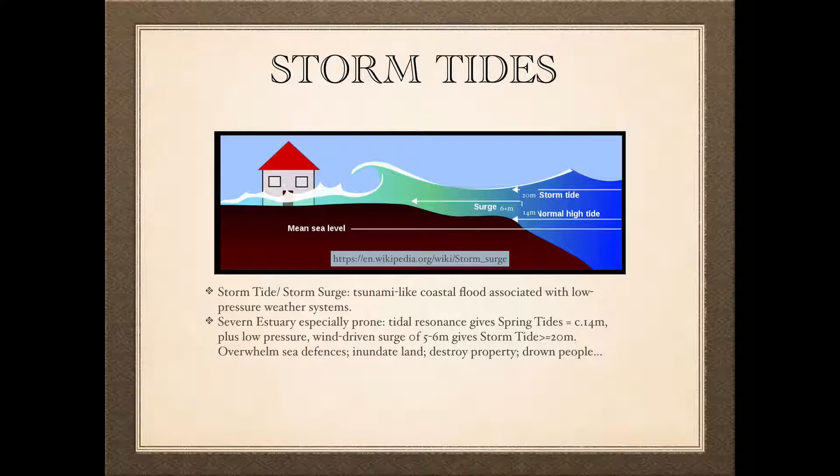Tidal resonance gives spring tides of about 14 metres range. If you add to that a low-pressure wind-driven surge of perhaps 5 or 6 metres, that would give you a storm tide of more than 20 metres. This would overwhelm sea defences, inundate the land, destroy property and drown people.

On top of that, we have to cater for the effects of global warming. Rising sea levels, increasingly severe storms and deeper depressions could lead to future storm tides of 25, 35 metres, more, who knows. However, it's not of immediate concern since it's a rare coincidence.

That rare coincidence means you would have to have a high spring tide plus a deep depression over the Bristol Channel raising a dome of water, plus storm-force winds up the Bristol Channel, creating what some people might call the perfect storm.

Then there's tidal resonance. The incident wave, caused by the moon's rotation around the Earth, is reinforced by reflections between the coast and the continental shelf edge, giving a much higher tidal range at the coast than at the centre of the ocean. The effect is most striking when the continental shelf is about a quarter of a wavelength wide.

The Bristol Channel has the second, some would say the third, highest tidal range in the world. And with the Severn Estuary funnel, it forms this 14-metre tidal range, which is unique.

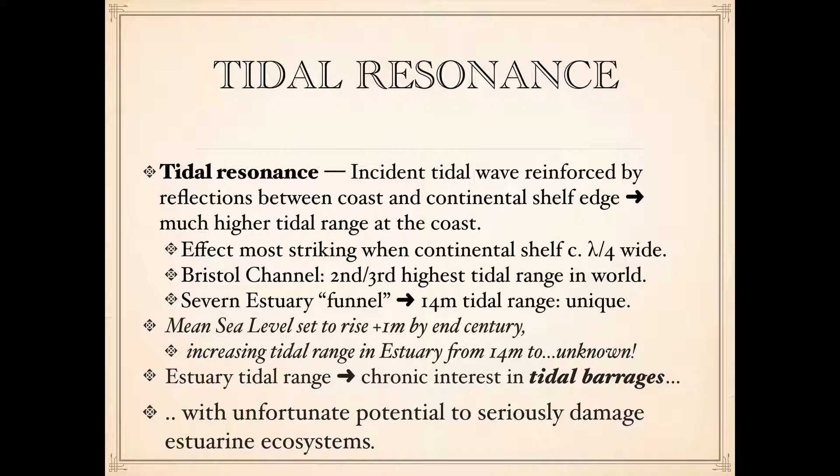The mean sea level is set to rise by more than a metre by the end of the century, increasing the tidal range in the estuary from 14 metres to who knows. The estuary tidal range has been of chronic interest to those with a view to creating tidal barrages, and tidal barrages have an unfortunate potential to seriously damage estuarine ecosystems.

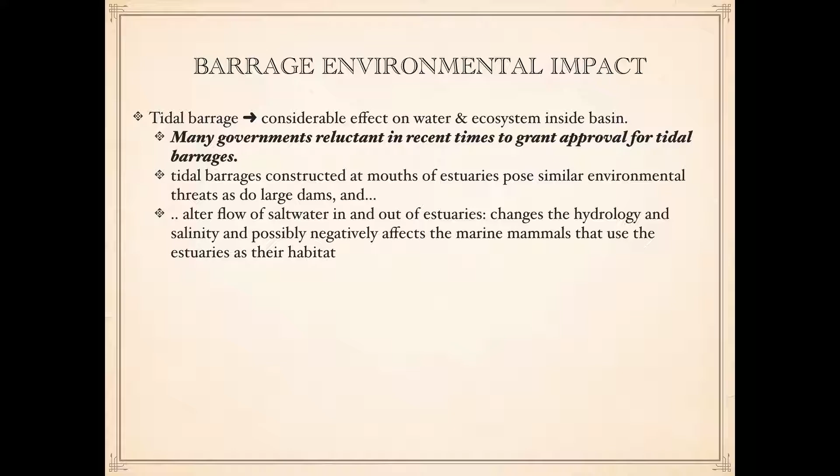Many governments have proved reluctant in recent times to grant approval for tidal barrages. The La Rance plant off the Brittany coast of northern France was the first and largest tidal barrage plant in the world.

It's the only site for full-scale evaluation of the ecological impact of a tidal power system operating for 20 years. The isolation of the estuary, both during construction and operation of the tidal barrage, was detrimental to the flora and fauna. After 10 years of operation, there's been a variable degree of biological adjustment to the new environmental conditions, which is politico-speak for: the ecology was seriously damaged and has recovered somewhat, but the flora and fauna are different from those that were there originally.

Sandbanks have disappeared, beaches have been badly damaged, and high-speed currents have developed near sluices.

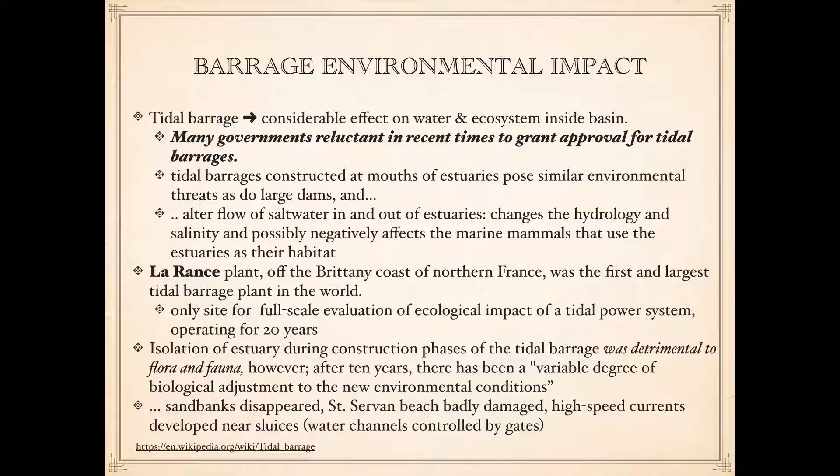Tidal barrage is not the only way to extract energy from the tide. However, it has to be said that tidal barrage maximises electrical energy generation using the potential energy of a dammed lagoon or estuary. This dams the river or estuary twice per day, and it generates on the ebb tide only, by preventing outflow until the downstream level drops before opening sluice gates to rush water past or through turbines. In the process, it seriously disturbs the estuarine or riverine ecosystems, both during construction and daily during operation.

On the other hand, there is tidal stream, which generates more modest electrical energy from the kinetic energy of river flow, using, for example, underwater propeller turbines, which are like wind turbines but submerged and much smaller. It has to be said, technology of these underwater turbines has yet to mature, but some systems are proving successful in commercial use.

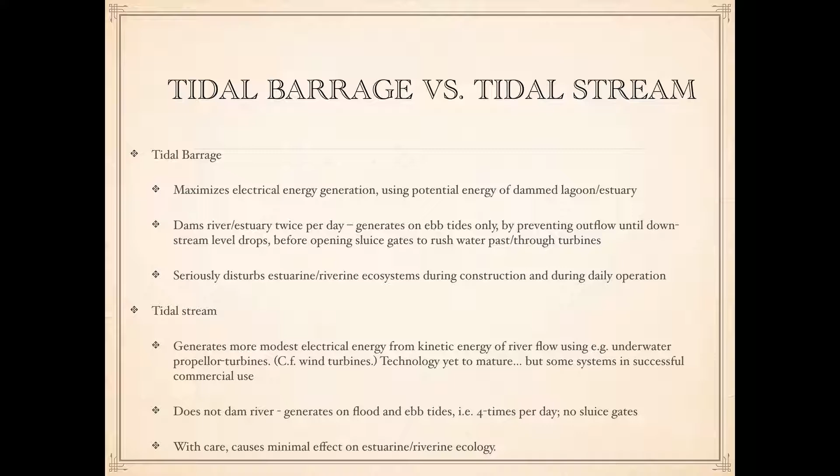Tidal stream does not dam the river. It generates on both the flood and the ebb tide, and so four times per day, and there are no sluice gates. With care, it causes minimal effect on the estuarine or riverine ecology.

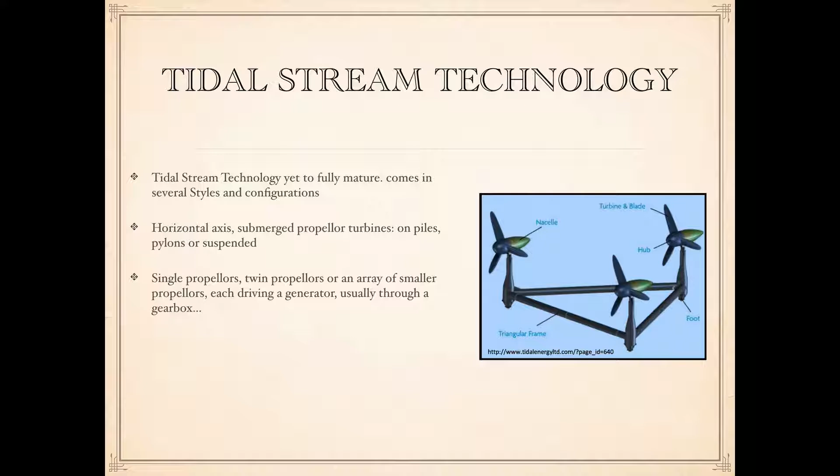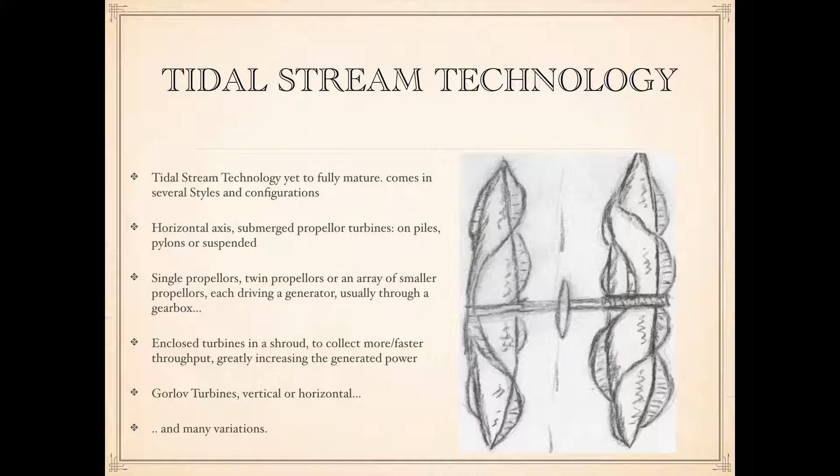Tidal stream technology has yet to mature, and it comes in several styles and configurations, as you can see. That's a Gorlov turbine. That's Gorlov turbines horizontal. And there's another thing, a poor thing but mine own, for shallow waters.

The question arises: is it practicable to build a Severn Estuary eco-barrier, corresponding with the Thames barrier, so not to be confused with the barrage? This would: 1. Protect low-lying coast, including population, towns, cities, power stations, resorts, the Somerset Levels, etc., against flooding and storm tides which would overwhelm even current upgraded sea defences. 2. Future-proof the estuary's habitats, archaeological sites, SSSIs, areas of outstanding natural beauty, hydrology and salinity in the face of rising tides and global warming.

3. Conserve the unique, precious, dynamic estuarine ecosystems. 4. Potentially assist with draining the Somerset Levels. 5. Generate sufficient energy, consistent with 1 to 4 above, to fund its own construction. And 6. Provide a post-construction legacy of green, lunar, renewable energy for the region.

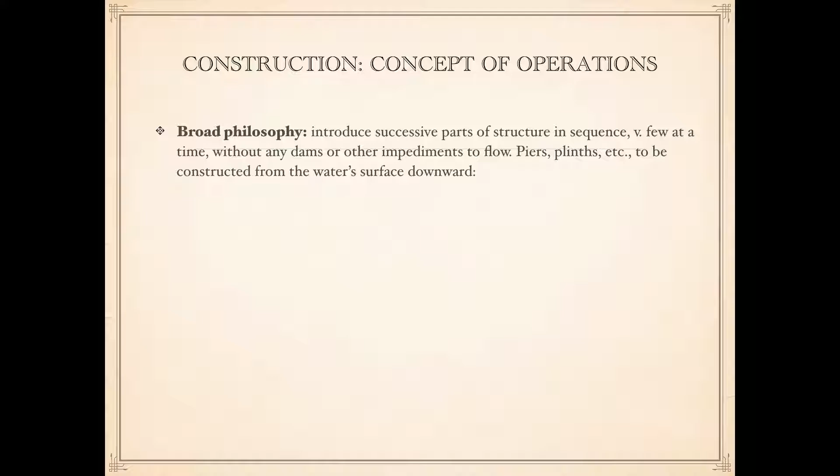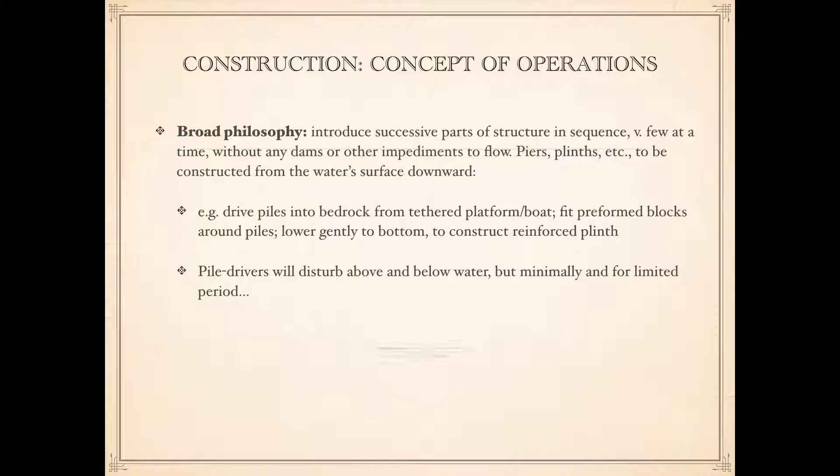Construction concept of operations: there's a broad philosophy to introduce successive parts of the structure in sequence, very few at a time, without any dams or other impediments to flow. So piers, plinths, etc. are to be constructed from the water surface downwards. There would therefore be a carefully phased introduction, allowing the estuary to rest and recover between activities. The whole is to progress in phases, with recovery breaks punctuating the phases.

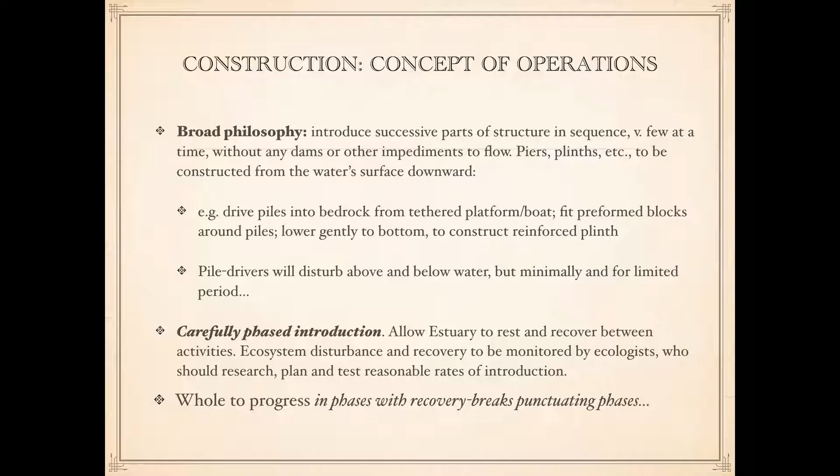And what would the notional first stage construction look like? Something like that, although I don't think it would be quite that simple.

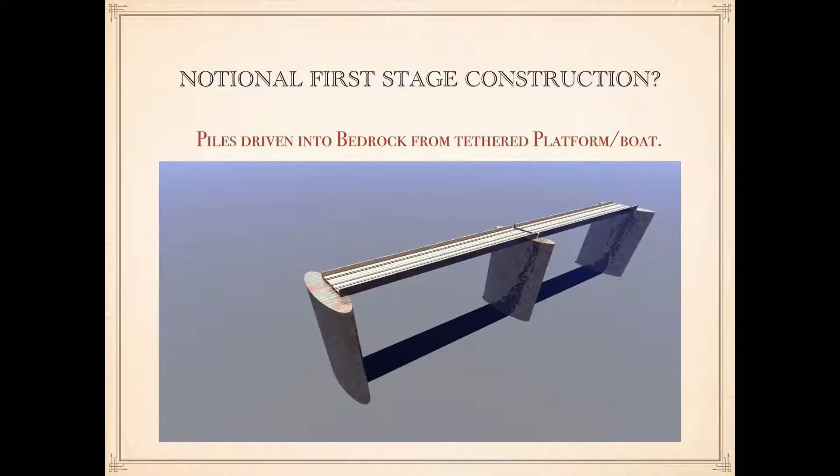There's the first plinth. It's a vitally important element, strong enough to resist a tsunami-type surge. It's streamlined above and below the water to minimise drag, and it has a hydrofoil planform to improve turbine efficiency. It's constructed from the surface downwards to minimise impact on the estuary bottom, and may require arch extensions. There will be a post-construction pause to assess the ecological impact of creating it.

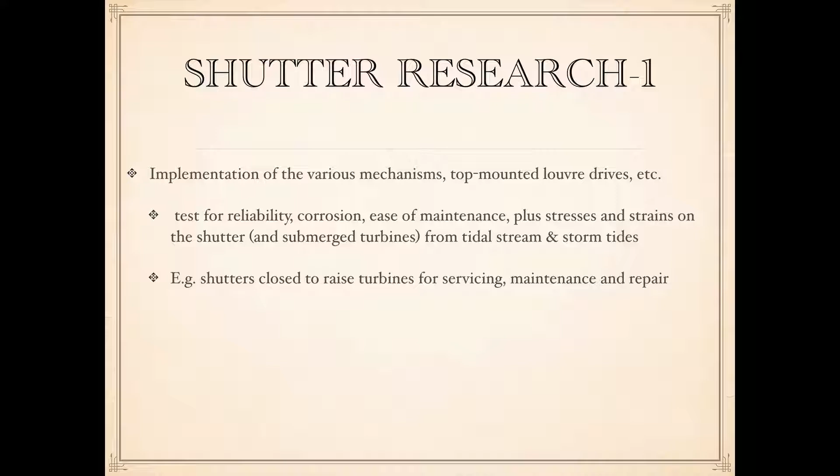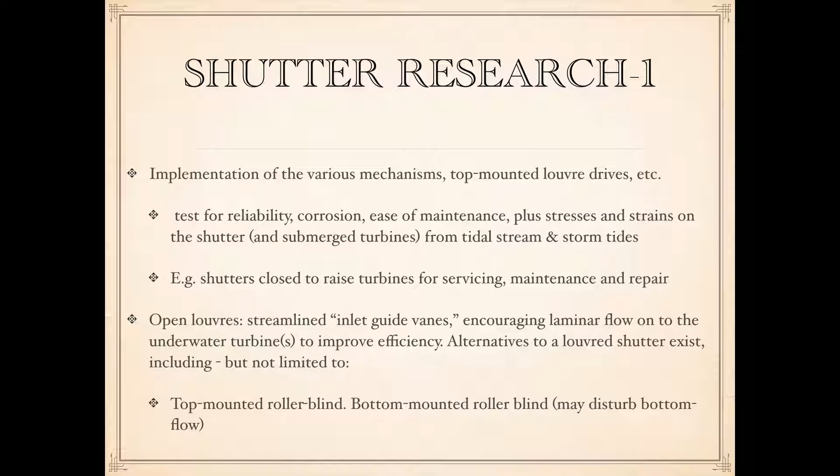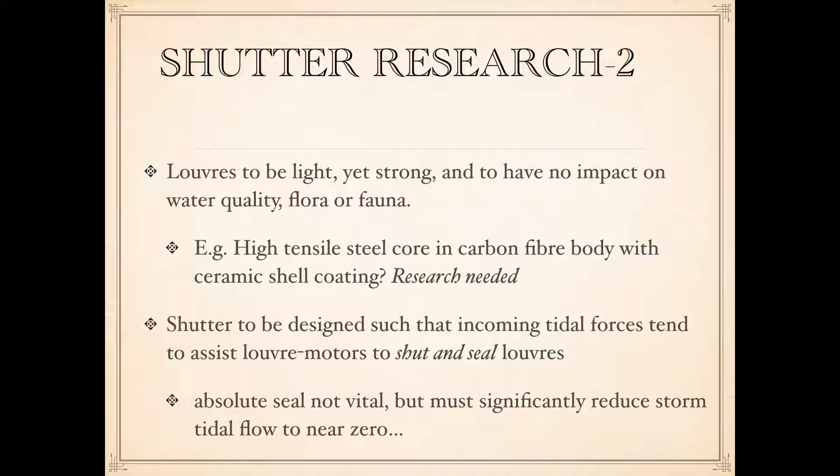There'll be quite a bit of shutter research to be carried out. The open louvers would serve as streamlined inlet guide vanes, and there are alternatives to a louver shutter, as I've shown there. The louvers have to be light yet strong and have no impact on water quality, flora or fauna. They'll be designed such that the incoming tidal forces tend to assist the louver motors to shut and seal the louvers.

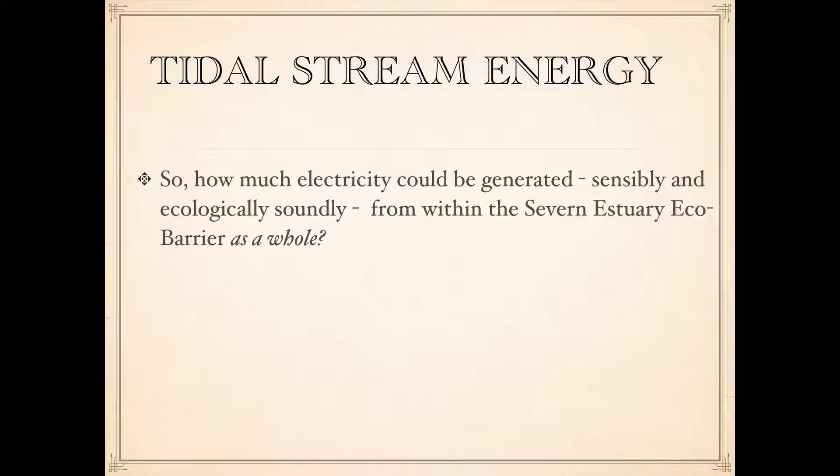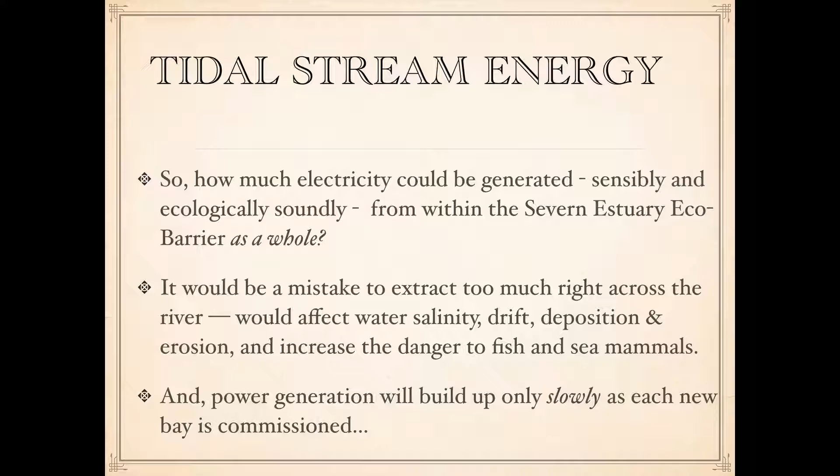Tidal stream energy. So how much electricity could be generated sensibly and soundly from within the Severn Estuary eco barrier as a whole? It would be a serious mistake to extract too much right across the river. That would affect water salinity, drift, deposition and erosion, and increase the danger to fish and sea mammals, repeating the mistake of the tidal barrages. It should be remembered that power generation will build up only slowly using tidal stream energy as each new bay is commissioned.

Orchestrating the eco barrier. We would consider it appropriate to control each and every bay individually and collectively - orchestrating the eco barrier, bay by bay, and as a complete suite of bays. We have a number of tools: shutters could be open or closed, turbines could be generating, idling, or driven as fans by passing electricity through them, and the turbines could be raised or lowered within their water column.

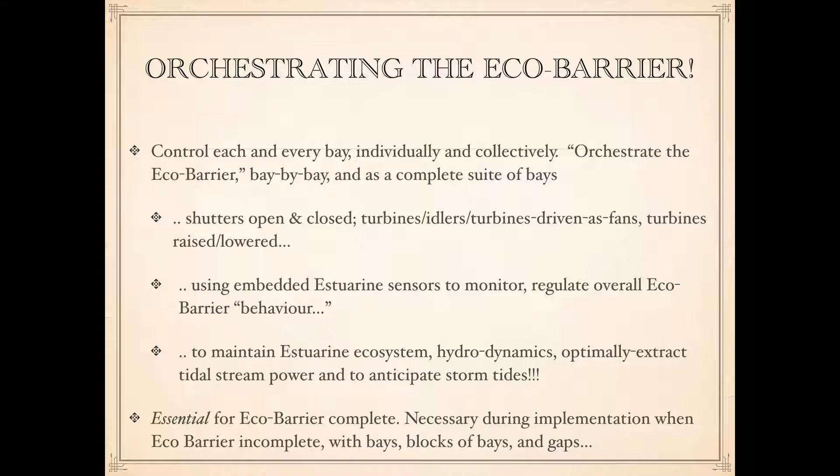We would use embedded estuarine sensors to monitor and regulate the overall eco-barrier behaviour so as to maintain the estuarine ecosystem and hydrodynamics, to optimally extract tidal stream power, and to anticipate storm tides. Such orchestration would appear to be essential for the eco-barrier complete, and necessary during implementation when the eco-barrier might be incomplete with bays, blocks of bays and gaps.

Tidal stream power developments. Seaflow is a marine current turbines enterprise installed off the coast of Lynmouth, quite near where we would propose putting the eco barrier. Lynmouth is in North Devon, and this was something of an experimental exercise which was successful. The MCT is to proceed with a DTI part-funded double turbine consisting of 2, 600 kilowatt rotors attached to just one steel pile system called SeaGen.

That would give, at full blast, 1.2 megawatts on the one steel pile. It is, however, large - SeaGen weighs in at some 300 tonnes, with twin 20-metre marine propellers. And it indicates the potential for barrier tidal stream power generation per bay.

With tidal energy converter technology still in development, it's difficult to predict the power per bay in, say, 20 years from now. I have made a guesstimate, a swag - a scientific wild-ass guess - that the power per bay could be between 0.5 megawatts and 1.5 megawatts. It's quite a wide range, but that keeps it reasonable.

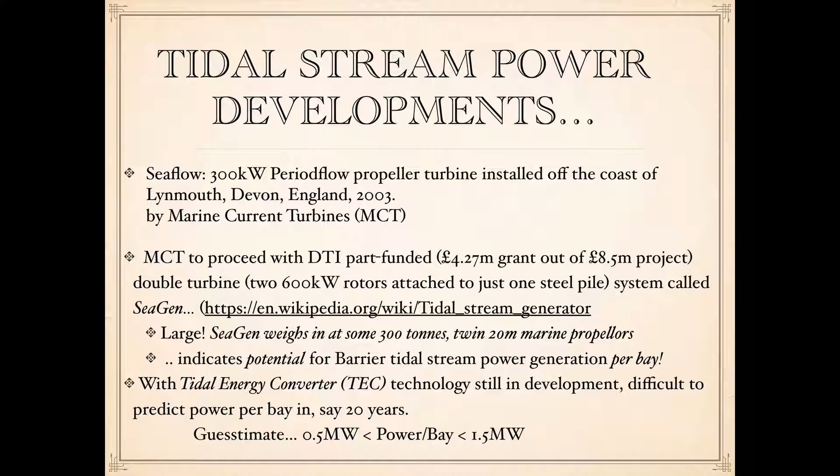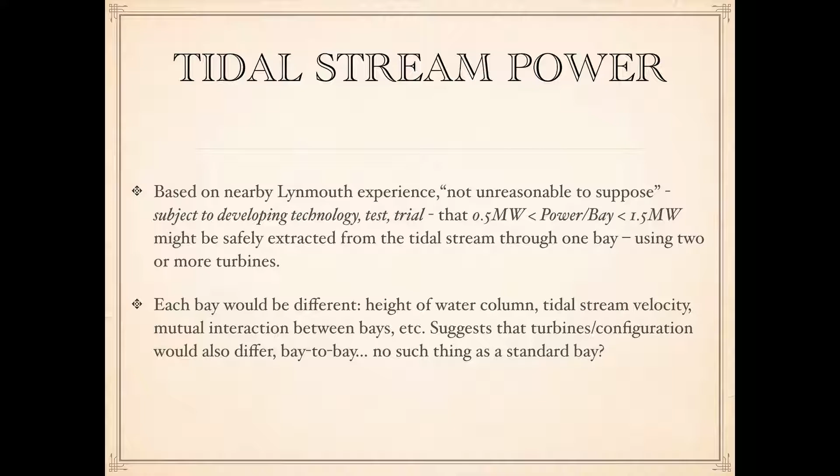So based on the nearby Lynmouth experience, it's 'not unreasonable to suppose' that, subject to developing technology tests and trials, between 0.5 and 1.5 megawatts might be safely extracted from the tidal stream through one bay using 2 or more turbines.

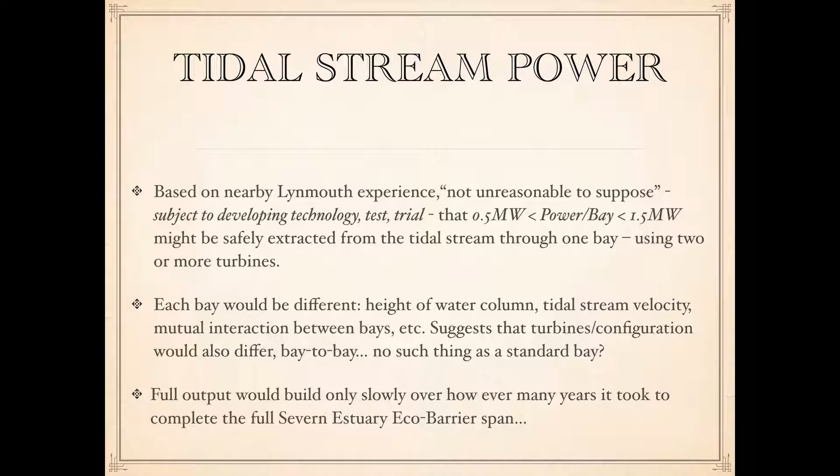Each bay would be different, however - they have different heights of water column, different tidal stream velocities, and there may be mutual interaction between bays, which suggests the turbines and configuration would also differ bay to bay, so there may be no such thing as a standard bay. The full output would build only slowly over however many years it took to complete the full Severn Estuary eco-barrier span.

Tidal stream power: in, say, a 20 kilometre span, there could be as many as 400 bays at 50 metres span each. Why the narrow span? The robust construction is necessary to withstand the tidal surge. All the bays together could generate 400 times the power per bay, meaning 0.4 plus or minus 0.2 gigawatts for 18 to 20 hours per day, which would be exceedingly green lunar energy - compared with Hinkley C nuclear power station, which is rated to come on at 3.2 gigawatts.

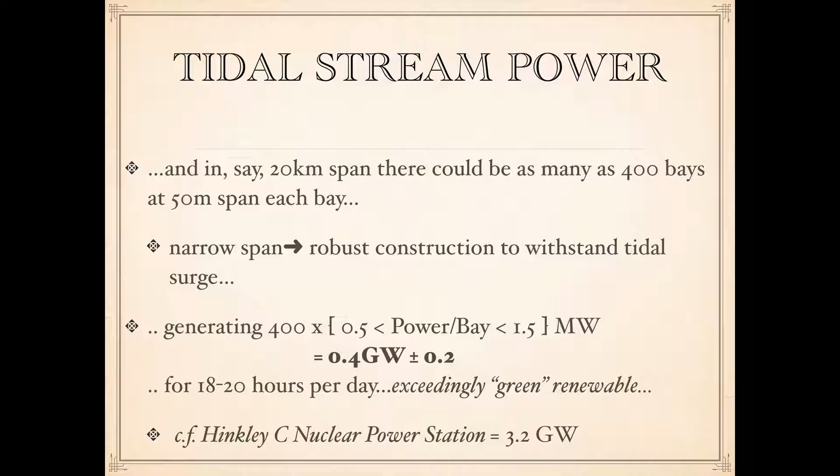The Severn Estuary Eco-Barrier economics. Building the Severn Estuary Eco-Barrier would be bootstrap economics. The first bay would sell electricity to the national grid, defraying the cost of a second bay. The two bays would do the same, funding a third bay, and so on. The eco-barrier would progressively fund itself with an exponentially rising income given the initial investment in the first bays, hence bootstrap.

We also use the funds to install ecosystem sensors, which we use to develop a sensory database, and we develop the eco-barrier orchestrator system. As bays come online, we commission the bays, we integrate the bays, and we commission the Severn Estuary eco-barrier, and manage and orchestrate it. That is the end of the construction phase, moving into the final operating phase.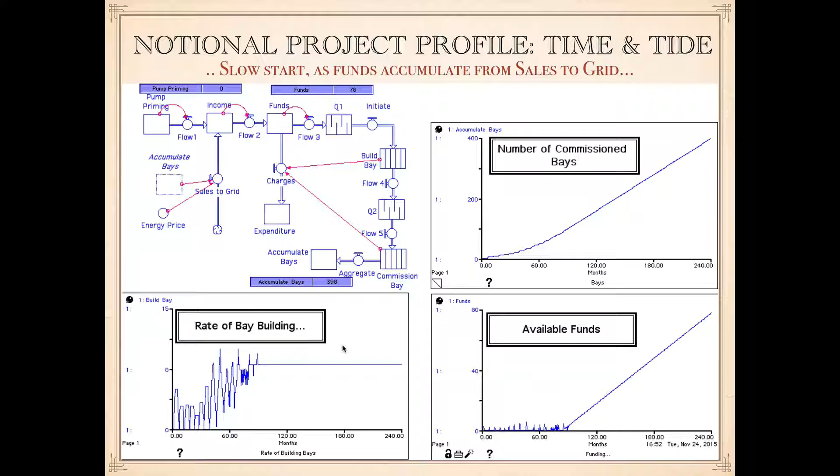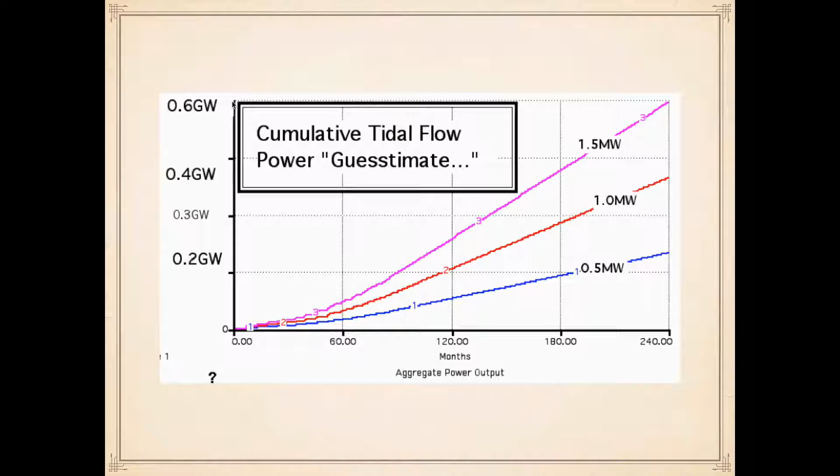And what are we getting out of it? This is the cumulative tidal flow power guesstimate. Each bay would produce between 1 megawatt, plus or minus 0.5 megawatts. So there's a 0.5 line, a 1 megawatt line, and a 1.5 megawatt line. At the end of 240 months, the 1 megawatt line would be producing 0.4 gigawatts from 400 bays, that's 0.4 gigawatts plus 0.2 minus 0.2 per bay. So about there somewhere, but quite a wide bracket. Could be more, could be less.

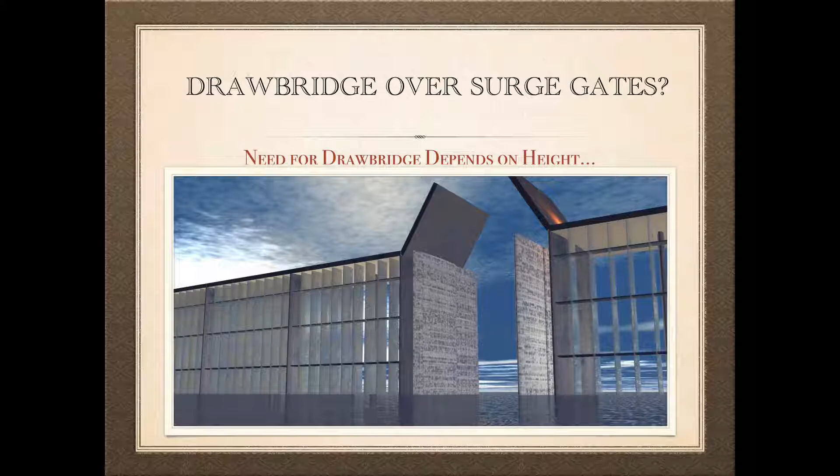Could it be another 10 metres? Possibly another 40 metres? Difficult area, but research is required here. However, it indicates that the overall structure will be large, could be anywhere between 30 metres and 45 metres above sea level. A drawbridge will be required unless the height is sufficient to pass shipping underneath. By way of reference, the Severn Bridge has a 47-metre clearance beneath it.

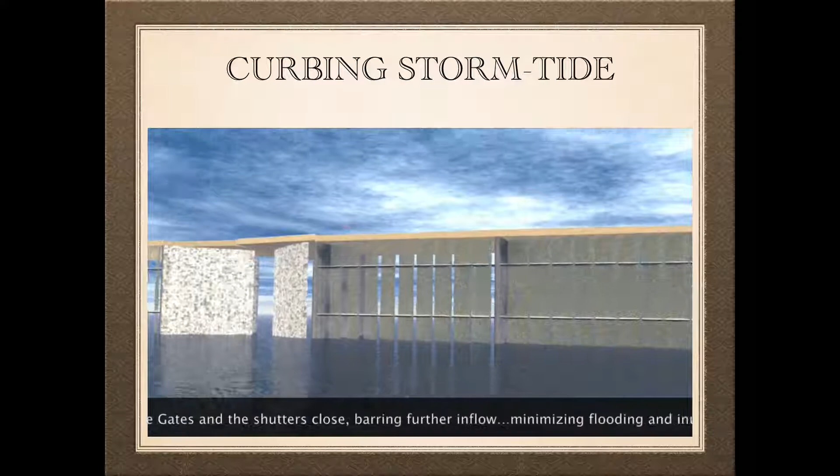How can the eco barrier assist in draining the Somerset levels? Well, the mouth of the River Parrett, which is a principal drain of the Somerset levels, is tidal. And that can cause the drain to back up rather than flow into the estuary, prolonging flooding on the levels. This apparently happened during the 2013-14 floods.

The eco barrier could, in such extreme circumstances, close off incoming waters such that only a low neap tide occurred, reducing or stopping altogether tidal backup in the Parrett and other rivers, but without undue effect on wildlife. This would be an unusual occurrence, but appears both feasible and reasonable.

Location, location. Where to site this Severn Estuary eco-barrier against storm tide? There are, as you can imagine, many criteria. The eco-barrier should protect as many vulnerable locations as possible - Somerset levels, SSSIs, habitats, low-lying coastline and population. Ideally it should butt onto cliffs to prevent storm tides from skirting around the ends of the eco-barrier.

The tidal stream velocity at the site should be sufficient to generate electrical power efficiently, and the ground beneath the eco-barrier should be suitable for driving piles into bedrock. The following maps may guide the choice of preferred location.

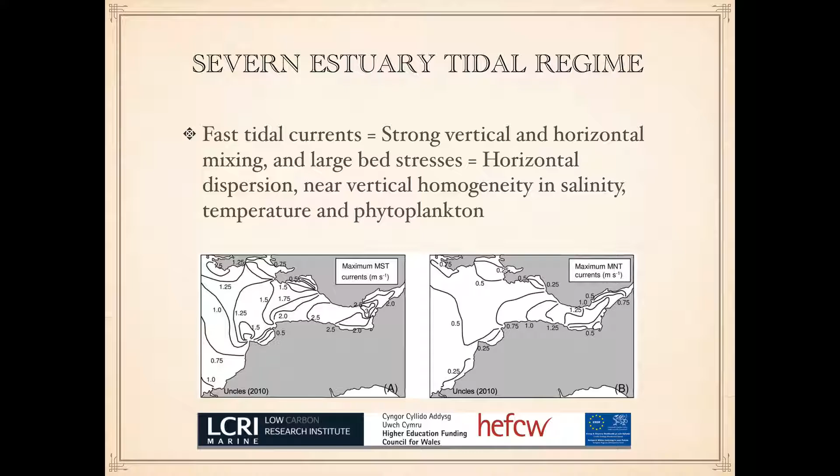The preferred location on the face of it appears to coincide with the boundary of the Severn Estuary, since that protects most, if not all, vulnerable sites and situations. There are cliffs at both ends, and there's adequate water tidal stream velocity. However...

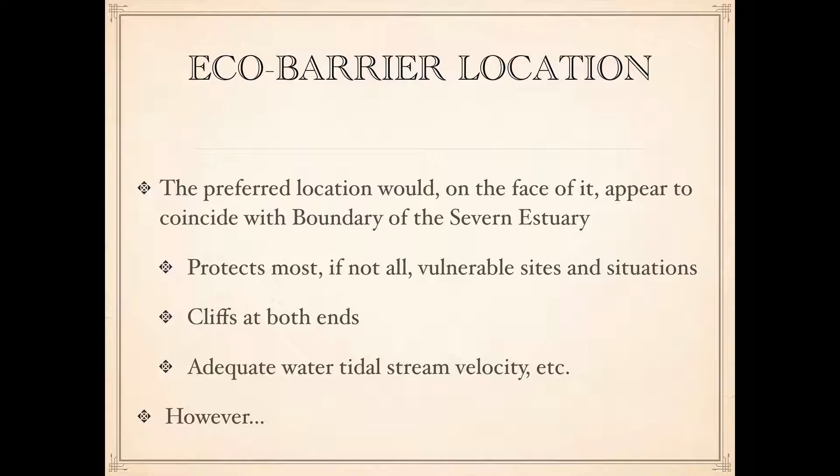Locating the Severn Estuary eco-barrier on or near the estuary boundary to the south would impinge on the Exmoor Heritage Coast and the southwest coast path in West Somerset, and to the north it would impinge on the Glamorgan Heritage Coast. So a second question arises: is it possible to reconcile an eco-barrier on the estuary boundary with the interest of preserving the unique natural environment of the Severn Estuary?

First, the Severn Estuary eco-barrier would be very green anyway, as its name implies. It protects the estuarine environment against destructive and deadly storm tides, and it generates very green lunar tidal power, as opposed to fossil fuel, nuclear, biofuel, wind farms and so on.

But the eco-barrier can also be physically greened by turning the eco-barrier deck into a natural park area accessible by the public via existing coastal pathways, etc., forming a natural habitat and corridor for birds, insects and small mammals.

By planting the upper decks with trees, bushes, grasses, etc., indigenous to the two interconnected coastlines, and by providing pathways for pedestrians and joggers, buggies for the disabled, cycle paths for cyclists, etc. It would become a potential tourist attraction and provide income for both South Wales and West Somerset.